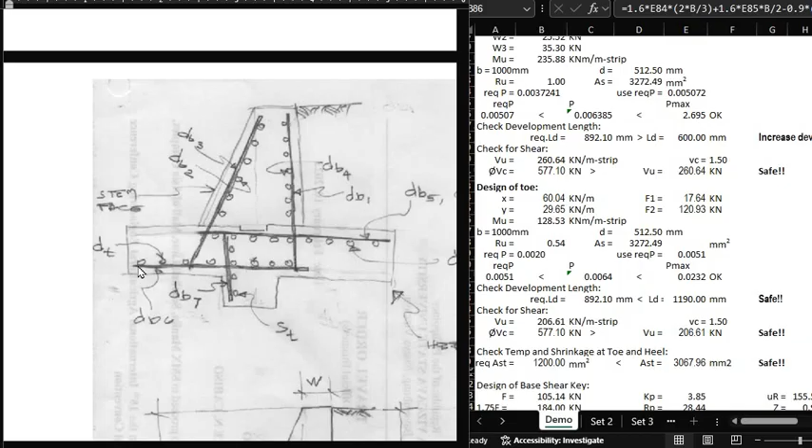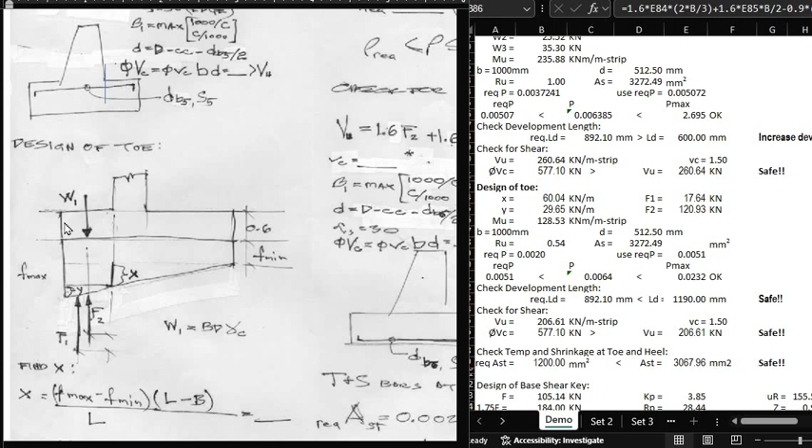Now, punta tayo ngayon sa weights, which is W1. Ang W1 is this part of the footing from dito hanggang dito lang sa edge nung stem.

But before that, as I've said kanina, ang goal natin is ma-design yung bottom bars na DB6. So, kailangan natin ng M sub U. So, ito yung moment. And then, dito sa moment, kailangan natin yung forces F1 tsaka F2.

F1 being the force due to this triangular polygon. Tapos, yung F2 due to the force na rectangular polygon. Okay? So, let us solve F1.

Itong F1, yan yung area nitong triangle. So, ang dimension ng triangle, yung vertical niya is Y. Tapos, yung horizontal niya ay B. Ngayon, yung B, given yan.

But, how do we solve for Y? So, ang ratio and proportion natin dito would be Y all over B is equal to this larger triangle. Okay? Ngayon, itong larger triangle na yan, that is Fmax minus Fmin all over L.

So, from there, makukuha natin yung value ng Y. And then, from there, we can solve the value of F1.

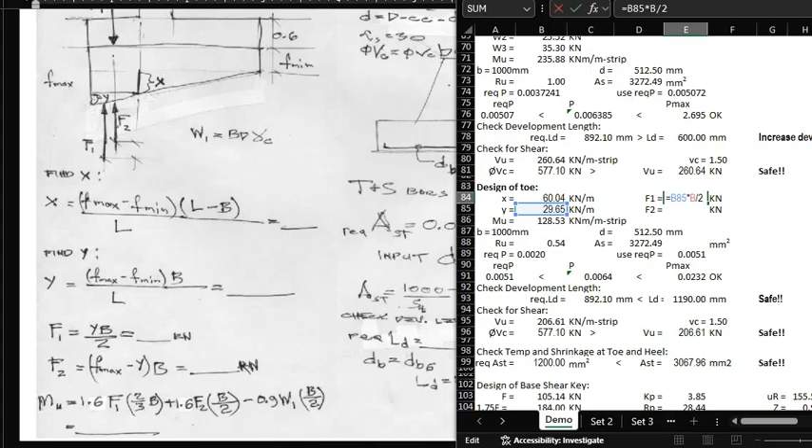Tapos, itong Y. Ayan, Fmax minus Fmin times B all over L. After that, sinolve natin yung F1 tsaka F2. Yan. And then, isinolve natin yung

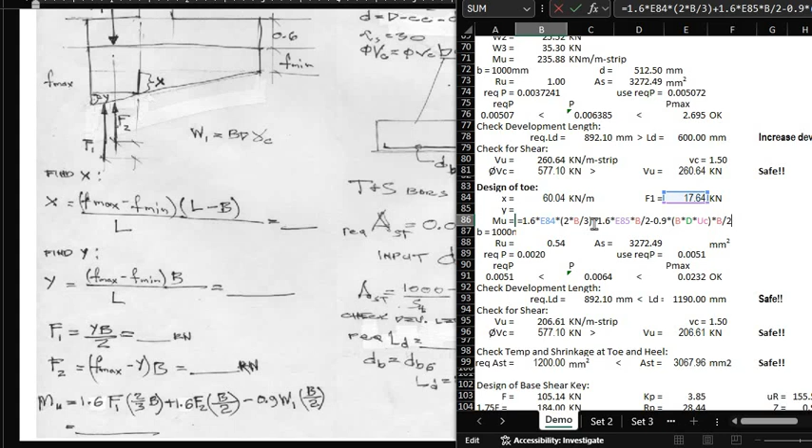W1, pero naka-embed na siya dito sa M sub U. Ayan, okay? So, 1.6 times F1 plus 1.6 times F2. Okay? Nakalink siya doon. And then, minus 0.9 times W1.

Ito yung W1 which is B times D times unit weight of concrete. Ayan. So, punta na tayo ngayon sa singly reinforced beam, which is this part. So, ang kailangan natin ay, again, yung unit width na B, tapos ang D natin is,

effective depth D is dimension D minus clear cover minus dB6 all over 2. Which is this. And then, ang RU natin is M sub U divided by 0.9 BD squared.

And then, yung actual AS natin, ayan, yung area ng dB6, tapos 1,000 divided by S6, spacing 6, para makuha natin yung number of pieces. And then, computein natin yung required rho.

However, yung required rho is less than rho minimum, kaya nagre-compute tayo ng rho. So, ang lumalabas na recomputed ay yung rho minimum. Now, we have to compare our actual rho kay required rho.

So, dapat mas malaki si actual rho kay required. And likewise, mas malaki dapat si maximum kaysa kay actual rho. And after that, we proceed to checking of the development length.

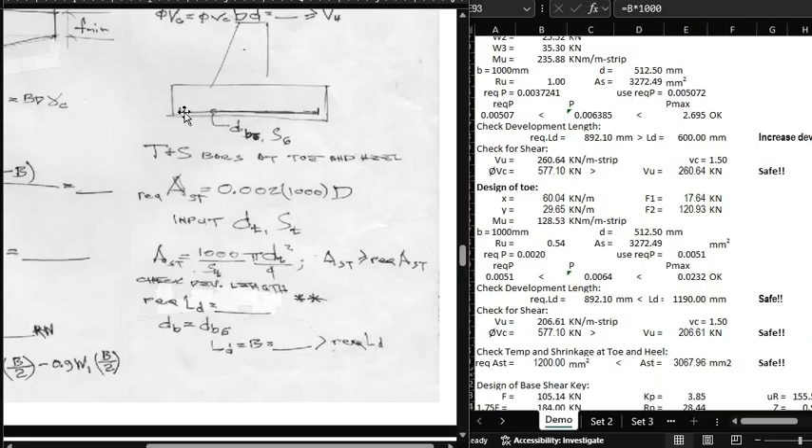So, dito, ang actual development length natin ay yung bakal na nandito sa ilalim ng toe, which is equal to B. Okay?

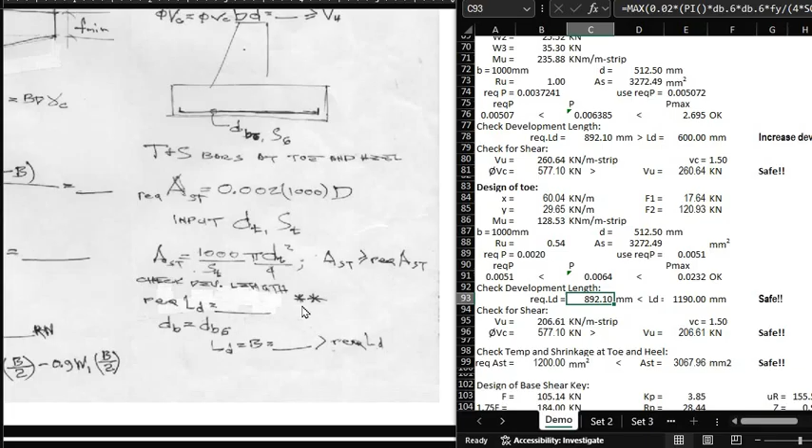Ayan. So, LD, actual development length, is equal to B. And then, ang ating required development length is this one. So, hanapin natin si double asterisk, which is ito. So, ang equation ng required development length is, ayan. So, 4 equations, 0.02 times pi times dB. Pero ang gagamitin natin dito ay si dB6. Okay, and then, second equation, 0.06 dB6 times fy, and then 300, and then this equation.

And then, you have to compare their development length. So, LD required is less than your actual LD. So, therefore, it is now safe. Otherwise, kung mag-fail, mas maliit si development length, gagamit ka ng hook or i-extend mo yung bakal pataas.

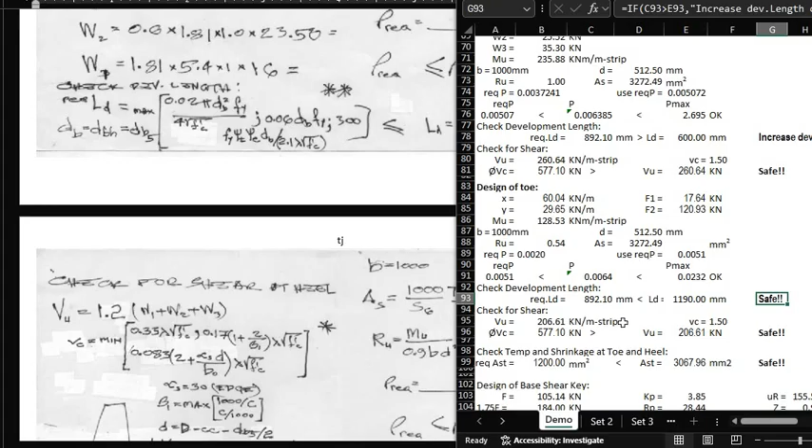Next is check for shear. So, ang chine-check natin dito is check for shear at toe. Yan. So, ang kailangan natin dito yung shear forces, VU, tsaka yung allowable shear force, VC.

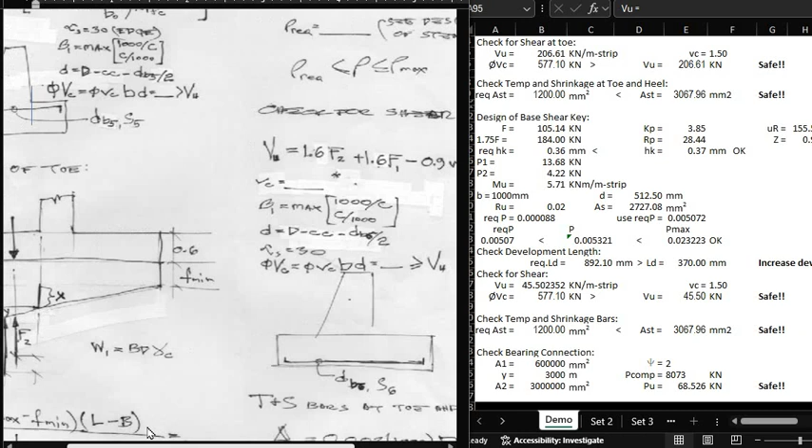Ngayon, ang shearing ay dito mag-occur. Okay? So, this part. Ngayon, ang VU natin would be yung forces kanina na ginamit natin sa MU.

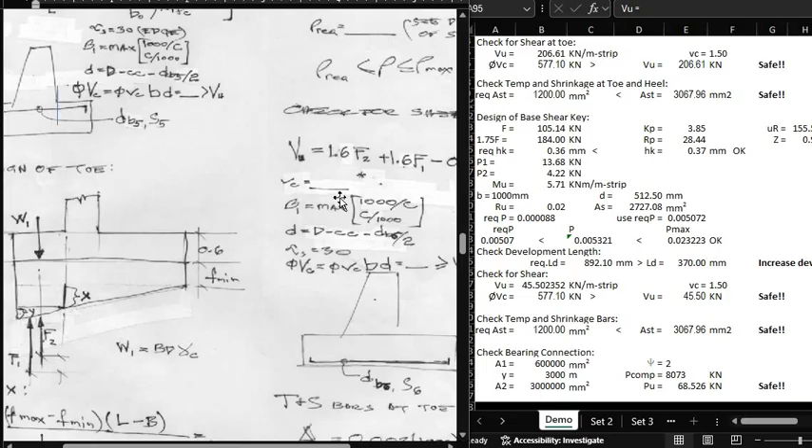Okay, so ayan. So, ang shear force natin is 1.6 times F2, yung vertical, positive, plus 1.6 F1. And then minus 0.9 W1. Tapos, ang allowable shear stress natin ay small vc.

So, this is equal to single asterisk. So, yung single asterisk na yan ay ito. So, yan ang gagamitin natin para makuha natin yung allowable stress. Okay? So, dito, so ito siya. Ayan. 1.6 times F1 plus 1.6 times F2 minus 0.9 times W1.

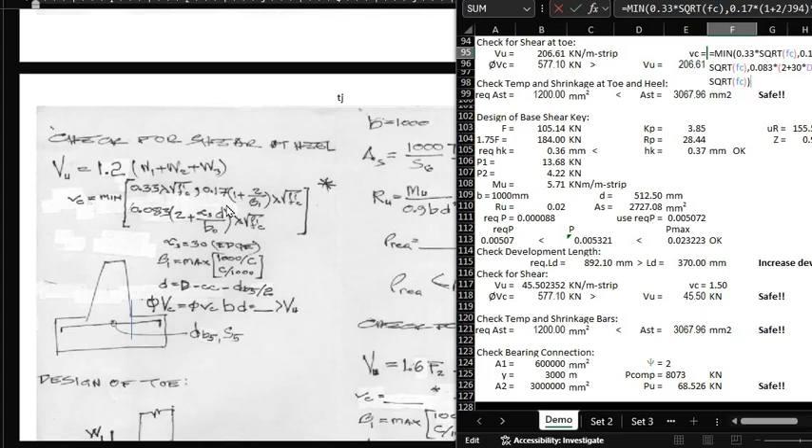Ito naman yung allowable stress VC. So, sinundan lang natin itong equations na yan. Okay? However, ang gagamitin mo dito ay yung effective depth D na ginamit natin dito sa toe. Okay? Nasaan yung effective depth D niyan? Ito siya. Yan. D minus CC minus DB6.

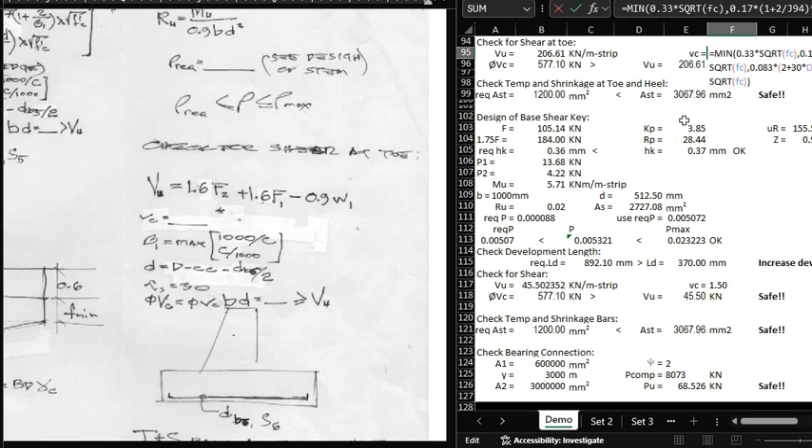Okay, and then we now solve for beta 1. This is maximum of these two conditions, which is ito. Yan yung beta 1. Ayan, which is the same as this condition.

And then solvein natin ngayon si phi VC or the allowable shear force. This is 0.75 times VC times 1,000 times D. Ngayon yung D, ito yan, yung D87 divided by 1,000 para maging kilonewton.

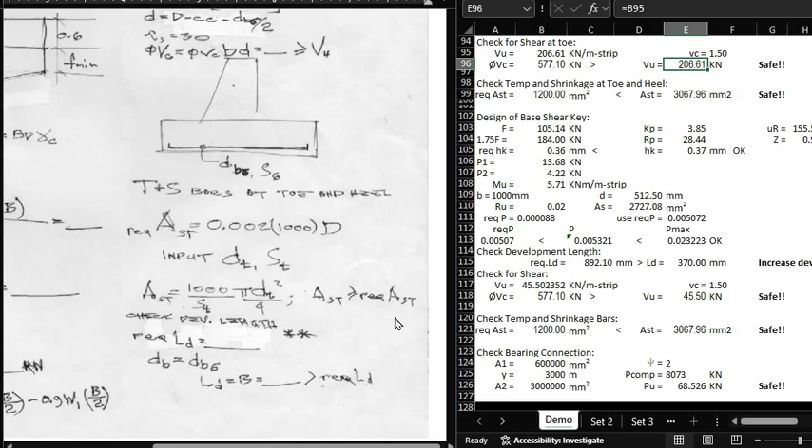Next, you compare that with your shear force VU. So, allowable is greater than your actual, so safe. And then next step would be temperature and shrinkage bars at toe and heel.

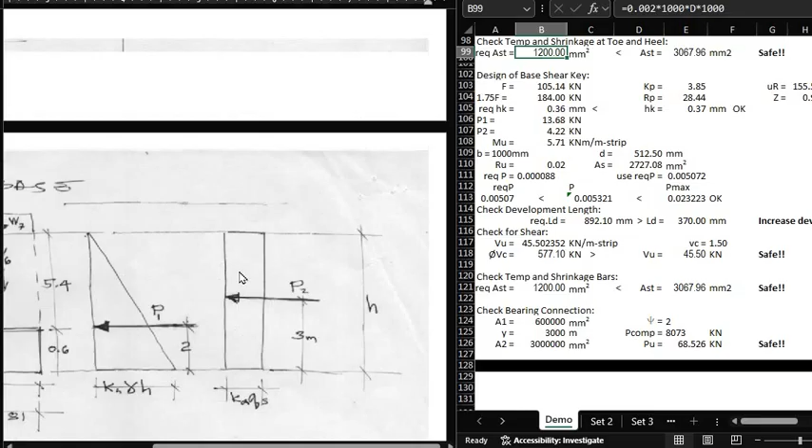So, ang required AST is 0.002 times 1,000 times D, which is ito. And then, ang actual AST natin is i-involve natin si DT. Okay? Ito yung temperature and shrinkage bars tsaka yung spacing na ST, which is nandito. Iyan. Okay? So, ito, ST, tsaka si DT.

Okay. So, na-compute na natin si area of steel. And then, na-compute na rin si required area of steel. And then, we just have to compare. Yang AST mo dapat greater than the required.

And lastly, dito na tayo kay check development. Tapos na natin si check development length. So, we now go to design of base shear key.

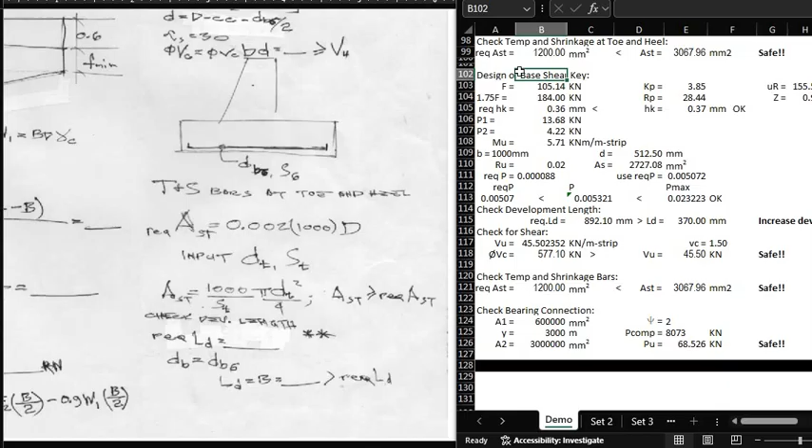Si base shear key, kailangan mo lang yan kapag nag-fail ka sa factor of sliding. So, balik tayo dito kay factor of sliding. Ayan. Fs sliding is 1.48, which is less than the minimum of 1.75. So, therefore, mag-provide tayo ngayon ng base shear key.

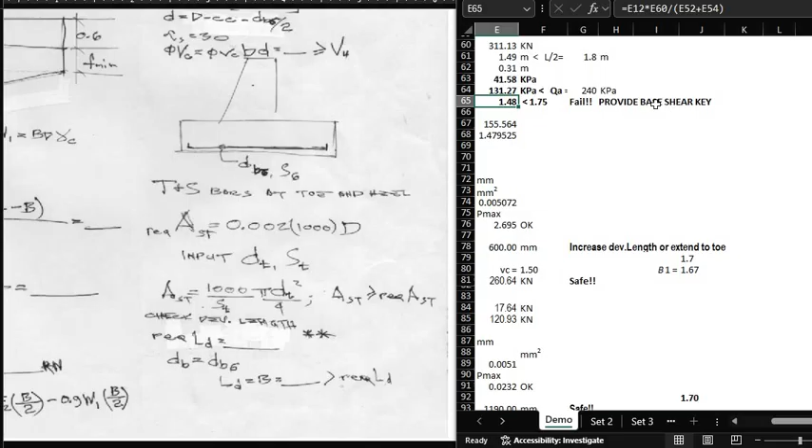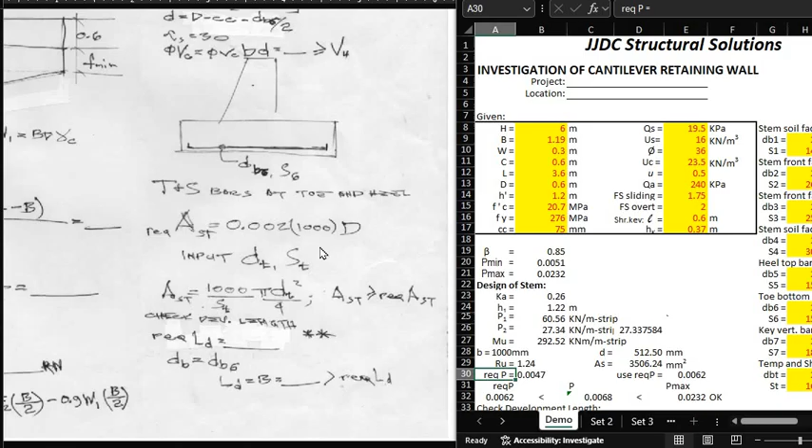And that is the reason now na gagamitin natin yung dimensions ng shear key na L tsaka HK. So, ipakita ko ngayon itong si L tsaka si HK. Okay. So, yung small L na yan, ito yon. And then, yung HK is yan, yung height ng shear key. Ito siya, no? Yan. L is 0.6 and then the height of shear key is 0.37. So, ito yon.

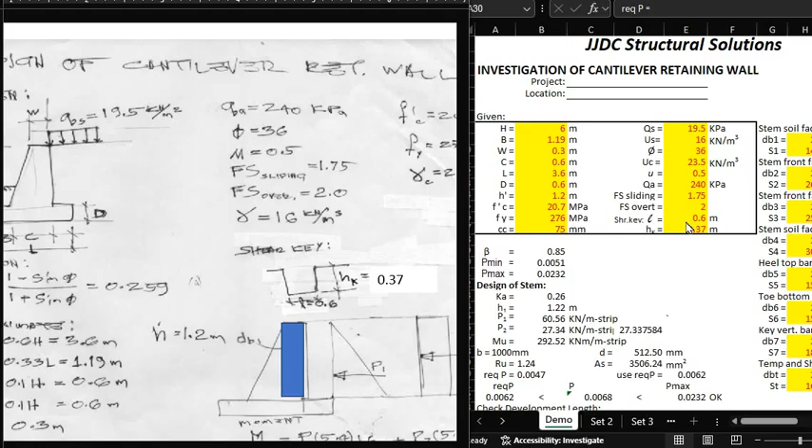Next. So, ang goal natin dito sa shear key ay kailangan ma-increase natin itong factor of sliding, ayan, na 1.48. Kailangan ma-increase natin yan ng 1.75. And to do that, magpro-provide tayo ng shear key.

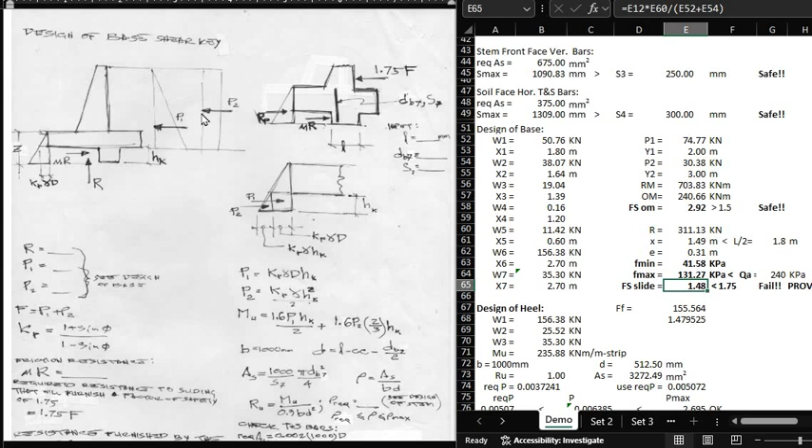So, first, let us identify the forces. So, with regards to factor of sliding, kailangan natin dito yung forces na magtutulak or lateral pressure na P1, P2. Tapos yung frictional force and that is due to the weights. Okay? Ngayon, yung weights, due to the weights is na-solve na natin kanina. Yan yung capital R.

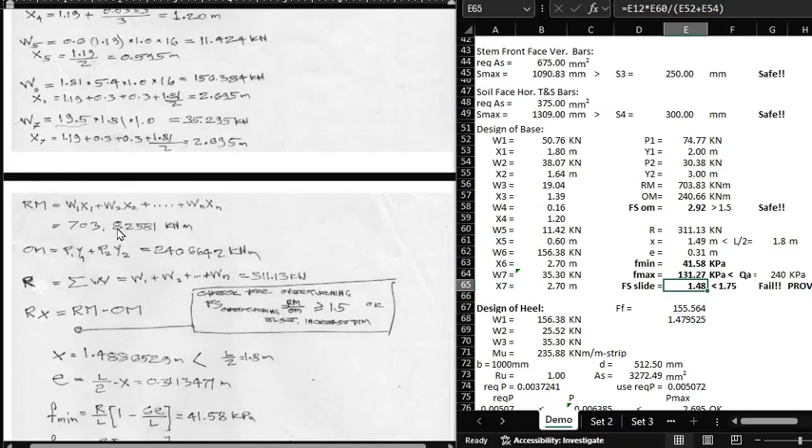Kailangan din natin yung P1 tsaka P2. Ito na yung galing sa Excel, nakalink yan sa design of base. Kung kukomputin natin yung P1, this is simply K sub P.

Ang gagamitin na natin ngayon dito ay passive coefficient, coefficient of passive pressure, K sub P. Etong base ng triangle is unit weight of soil times K sub P.

Pero kailangan natin yung P1 tsaka P2 para ma-solve natin yung F.

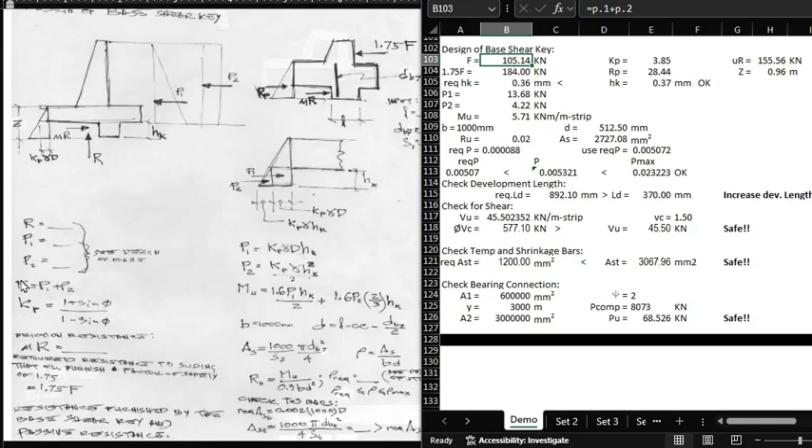Balik tayo dito kay Excel. Ngayon, check natin kung saan nakalink itong F, so that is equal to P1 plus P2. Nasaan ngayon yung P1, P2? Akyat tayo dito, ayun siya. Makikita mo yan doon sa part ng design of base. So yan yung F.

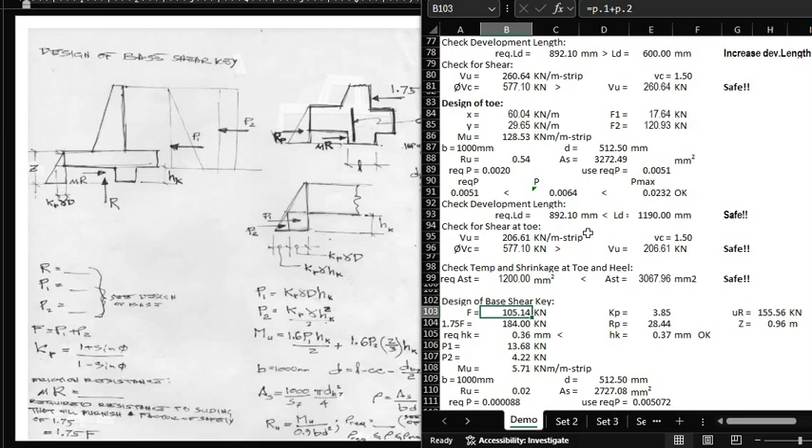Ang kailangan pala natin yung K sub P is etong P1, P2 nung shear key. Take note, etong P1, P2 nung shear key, this is different na ngayon sa P1, P2 nung galing sa design of base, ibang kwento na ito ngayon. Ang gagamitin natin dito ay yung passive coefficient K sub P.

Ito yung K sub P, 1 plus sin phi, this is greater than 3, kaya ayun siya, K sub P equals 3.85. P1 is equal to yan yung small triangle. Yung P1, ito yung rectangle, then P2 yung triangle. So P1 is K sub P times unit weight times D times HK.

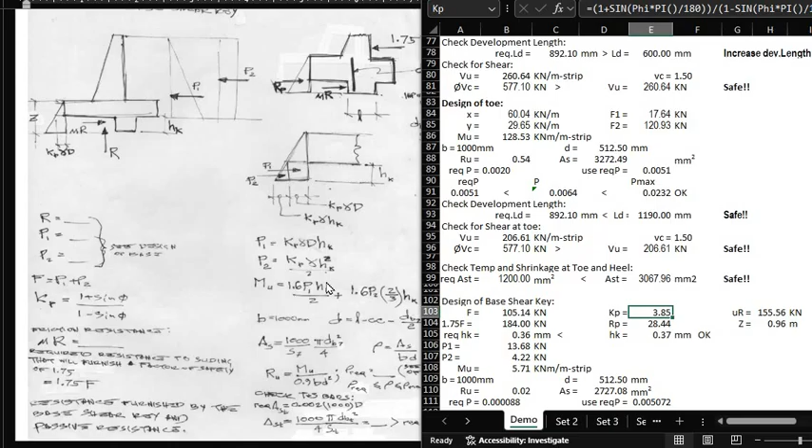Ulitin natin, ano itong P1 na yan? Actually, ito yon yung small triangle.

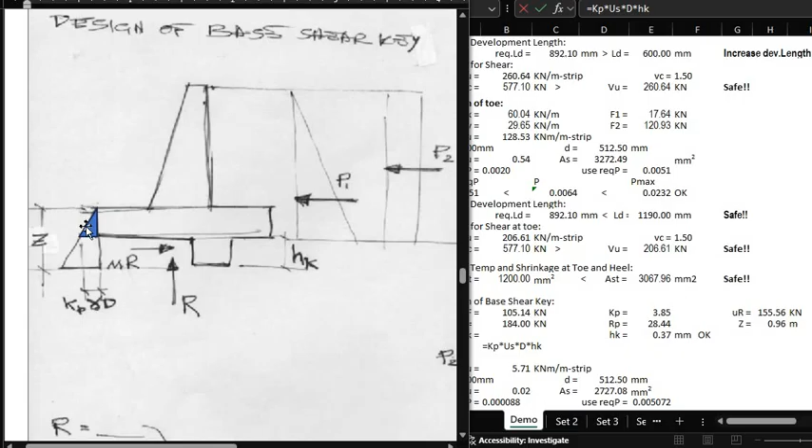Ang base nitong small triangle is K sub P times unit weight nung soil. Yung height nitong triangle, which is D, which is basically the depth of this footing. Itra-transmit natin dito sa ilalim, kaya siya naging rectangular loading. Yan, so ito na yung P1.

Mapapansin nyo, itong base nung rectangular loading na yan, gawa natin siya ng figure. Ang base nitong rectangle na yan is K sub P times unit weight of soil times D. Bakit D? Kasi ito yung triangle kanina. Yan ngayon yung pag-compute ng P1.

K sub P times unit weight times D times HK. Yung HK, yan yung height ng rectangle na yan. Next, we now go to P2.

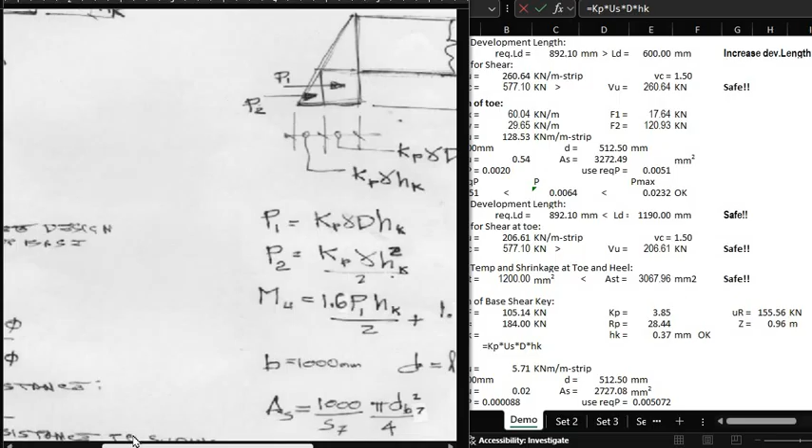Yung P2, ito naman yung small triangle. Ilipat natin yung triangle. Ang base nitong triangle is K sub P times unit weight times HK. Ang area ng triangle, so that corresponds to P2, is equal to K sub P times unit weight times HK squared divided by 2. And then, from there, we can now solve your moment.

Kailangan natin tong MU para ma-design natin yung bakal na ilalagay natin kay shear key. And then kailangan din nating isolve or check yung shear capacity ng key.

Let's take moment dito sa ilalim ng footing. Ang lever arm ng P1 is HK divided by 2. Ang lever arm ng P2 ay 2/3 of HK. So ang ating MU now is 1.6 times P1 times HK all over 2, plus 1.6 times P2 times 2/3 of HK.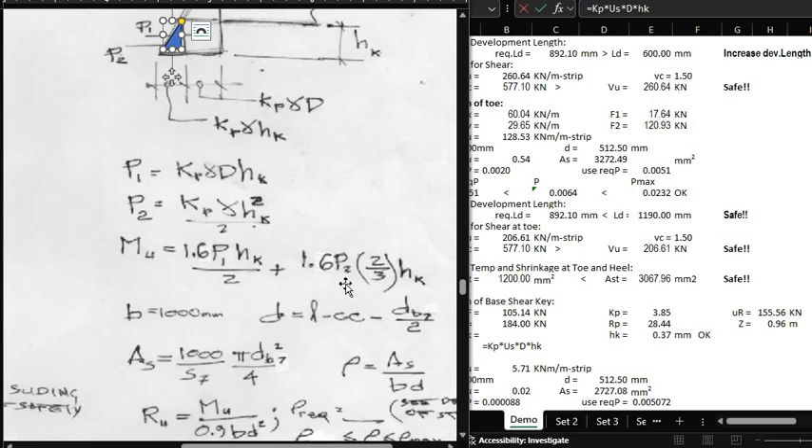And then we now proceed to singly reinforced beam. Before that, balik tayo dito sa design of shear key.

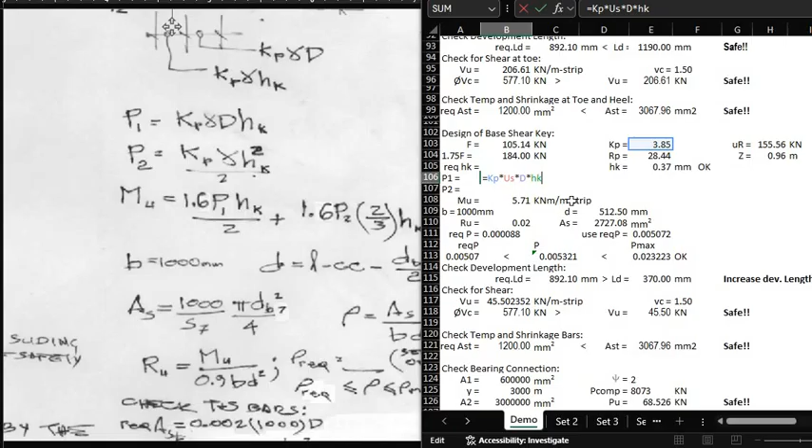Yung P1 tsaka P2, ito na yon, that is K sub P times unit weight of soil times D times HK. And then this is P2, and yan yung MU. Medyo nalampasan natin tong part na yan, so balikan natin yan.

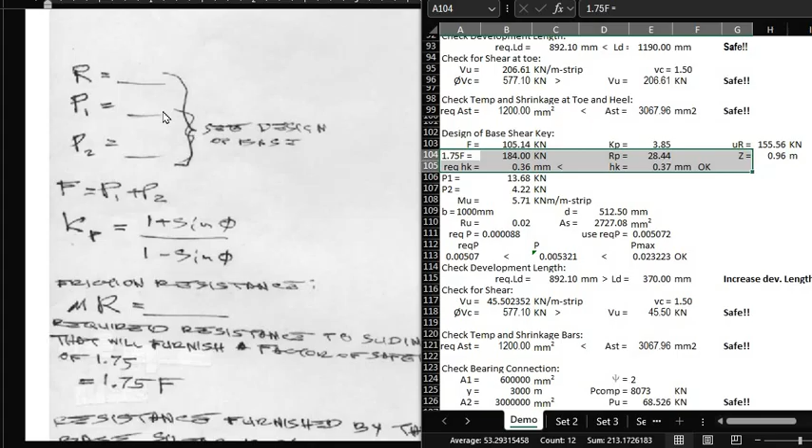Dito, yung force is equal to P1 plus P2. Pero yung P1, P2 na ito ay galing to sa design of base. Ang kailangan natin is 1.75 F, ito, and that is equal to this. 1.75 multiply natin dyan sa capital F.

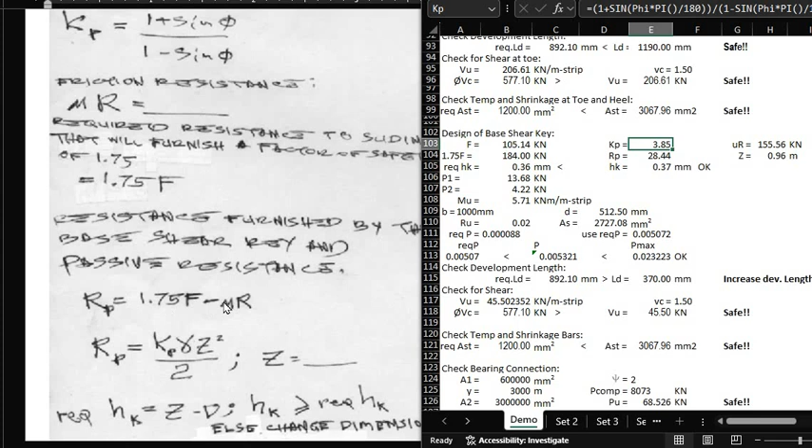The coefficient of passive pressure here is greater than 3. And then this R sub P, the passive resistance, is equal to 1.75 F minus mu R. Okay, which is this - 1.75 F minus mu R.

Now, what is this mu R? That is equal to simply 0.5 times R. Where is R? This is what we solved earlier in the design of the base. Okay, so that's it.

And then after that, we go back to R sub P. But take note that R sub P is equal to K sub P times unit weight times Z squared divided by 2. What is this equation?

That means this is the lateral force, the resisting passive force that counters. This is due to the triangular loading, so that's it. Okay, so we have Z.

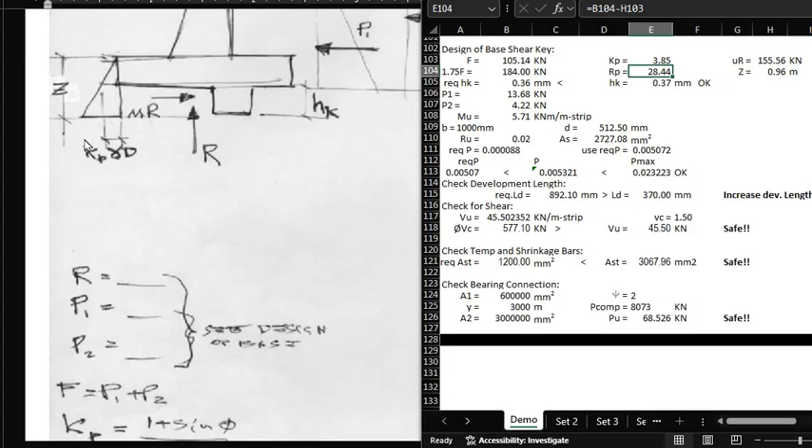So the area of this triangle would be K sub P times unit weight times Z, then the area is multiply again by Z divided by 2. Now you equate that to R sub P. So you can get the value of Z.

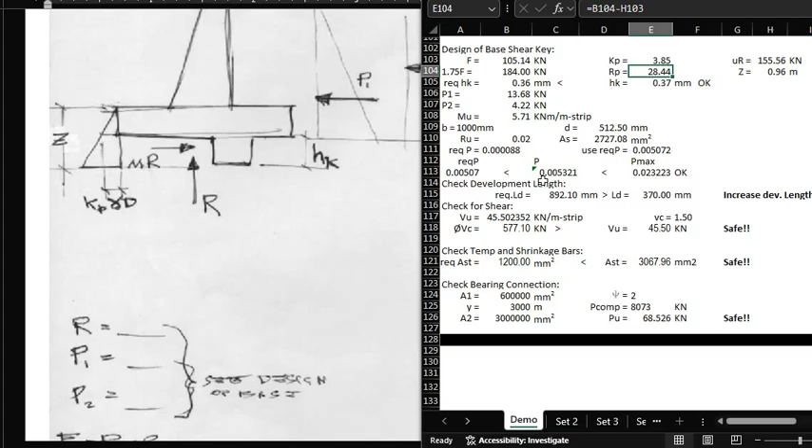And then from here, you can now get the required HK. So that's it. So, from R sub P, we got the value of required HK, which is Z minus D. Okay, let's solve first for Z.

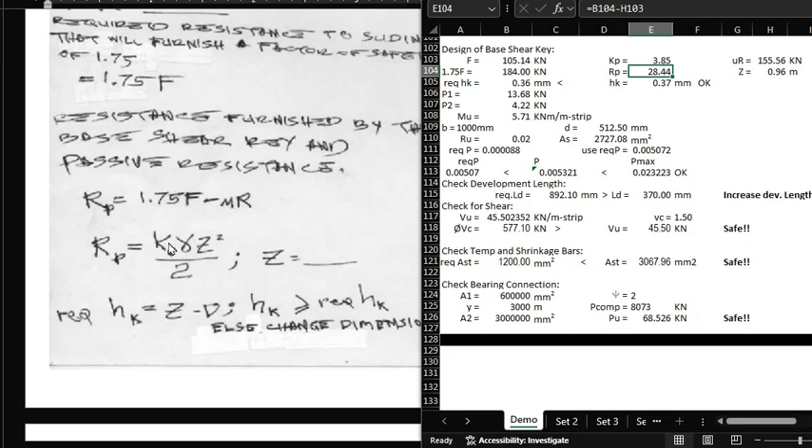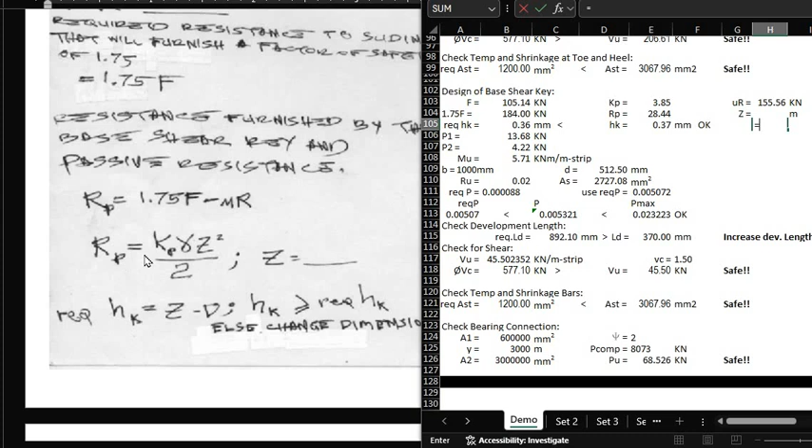Z is simply equal to RP times 2 divided by KP times unit weight, and then you just get the square root. Okay, this is it, right? So let me show, this is equal to R sub P times 2.

This is K sub P times unit weight of soil, or simply Us. Then close.

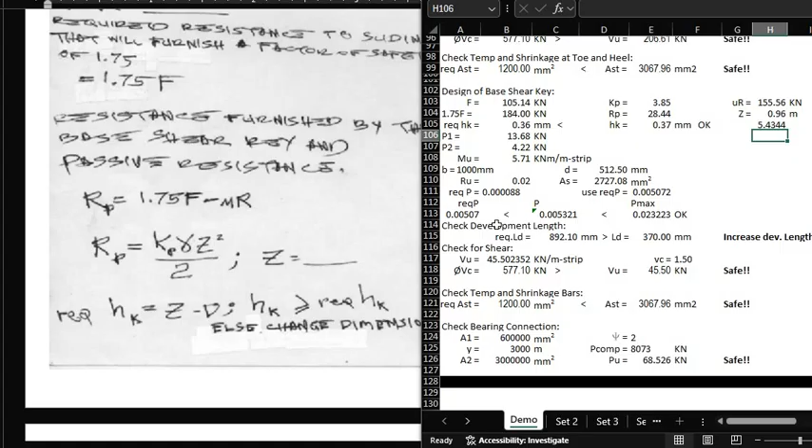After that, we take the square root of all that since there's a square root there, right? Then sqrt, open and close parentheses. Oops, wait. Okay, so here I made a mistake.

This mu, that's the coefficient of friction, U. It should be US. That's how I got the value of 0.96.

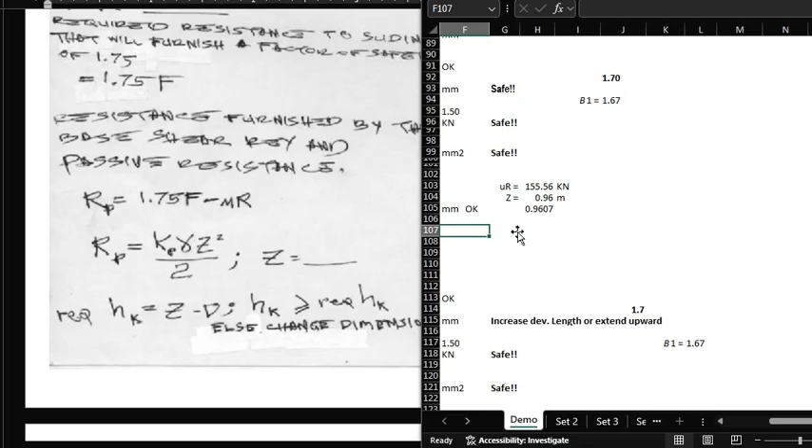And then from there, take note that this 0.96 is Z. So we minus this by D to get the required height of the key. So the required height of key is equal to 0.96 minus dimension D, which is 0.36.

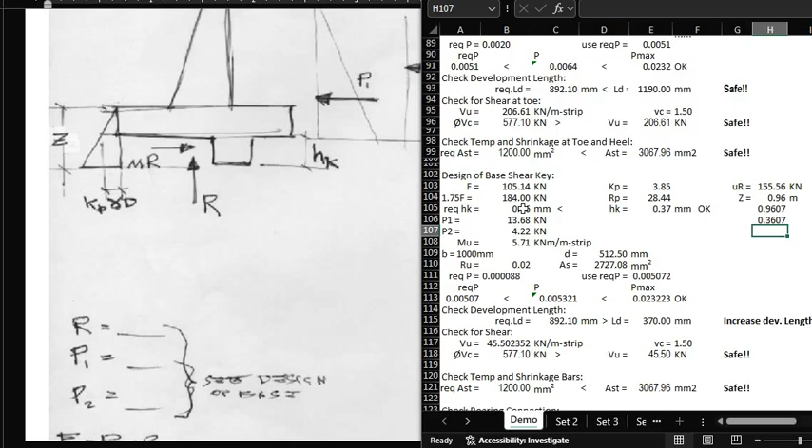Then you compare this with your input HK - input HK is 0.37. So from there, our HK is 0.37, the required is 0.36. Therefore, it's okay.

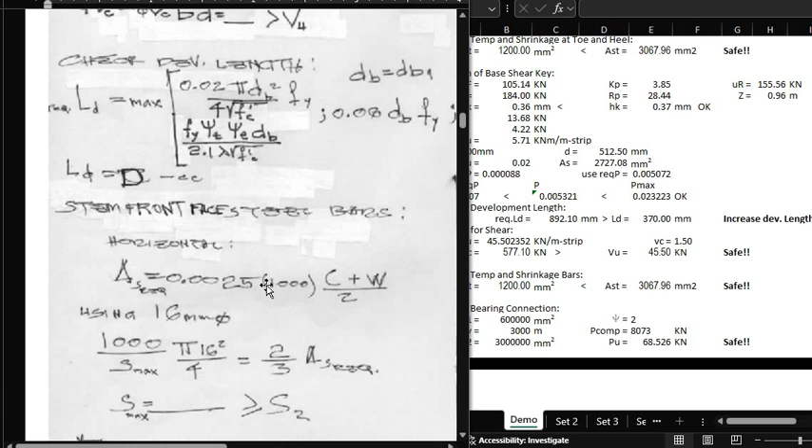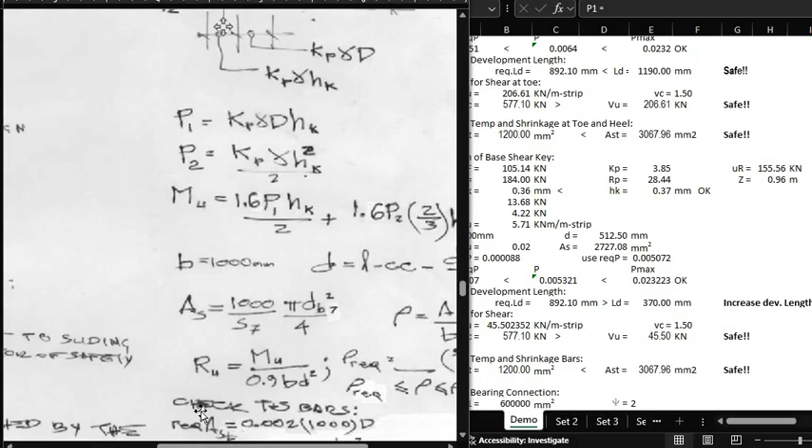So we already finished earlier the small p1 and p2, which is this - p1 and p2, the small ones. Then let's solve for M sub U: 1.6 p1 hk divided by 2, then plus 1.6 p2 times 2/3 of hk.

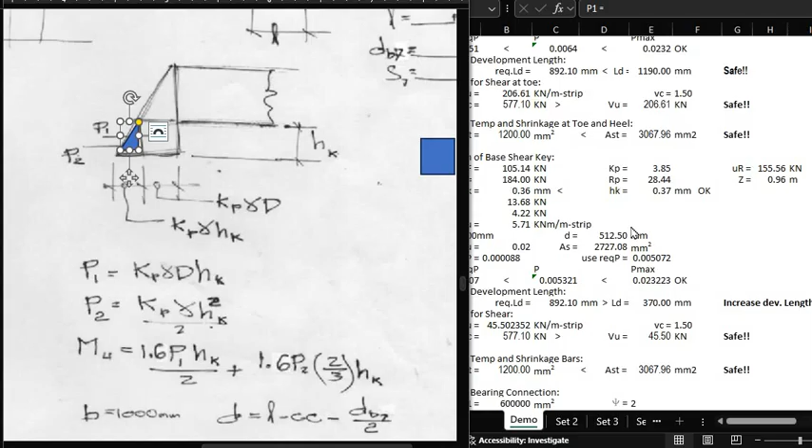Now the hk we will use here is the input, 0.37, not 0.36. Then we proceed to singly reinforced beam.

So here, our unit strip or meter strip is 1,000. And then the D is 512. Now our D is based on your length of the shear key. So small l minus cc minus db7 divided by 2 - that's our effective depth D. Okay, the E16, that's the small l.

Then our AS is this - so involved here now are DB7 and S7. And then we also compute our R sub U, which is M sub U divided by 0.9 BD squared.

And then you compute our required rho, 0.000088. Now this is lower than minimum rho, so we will use the minimum rho for our recomputed rho. And then from there, you...

Compute your actual steel ratio, rho, as AS over BD. And then from there, you compare this with your required rho. So this actual should be greater than required, and rho max should be greater than actual. And then after this is check development length of bar 7.